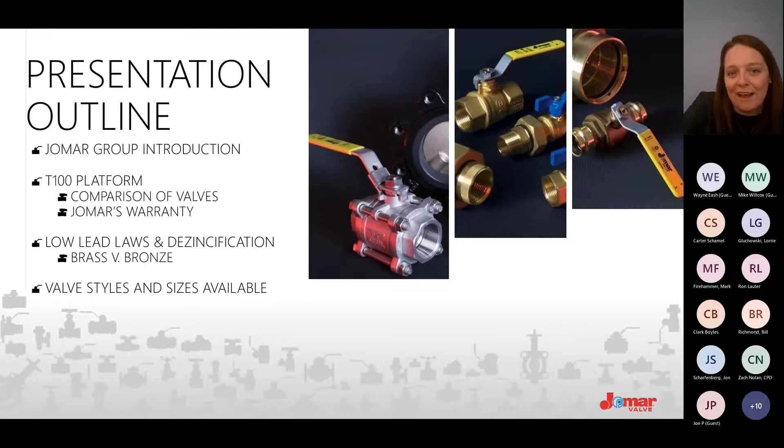We'll also talk about low lead and dezincification resistance, also known as corrosion resistance, and then we'll talk about our product offering. So again, please feel free to jump in at any time if you have any questions or want to know a little bit more about something.

So Jomar Group, we have been around since 1966. We were founded by a man named Joe Martin, hence how he created the term Jomar. We are based just outside of Detroit, Michigan, in a town called Warren, Michigan. The photo you see there, unfortunately, that is not Warren, Michigan. That is an aerial photo of our parent company, Pettinaroli. Our parent company is based about an hour outside of Milan, and it looks like that almost every single day of the year, with an absolutely gorgeous view of the lake.

That is where we manufacture. That is where we engineer, design, and test. That is where the bar stock comes in and the valves go out. It's really an amazing facility. So that is really where the majority of our product is manufactured, right there in Italy.

Now, one of the things that's really wonderful about Italy is that they meet the exception to the Buy American Act. So they still fall under the Buy American Act, even though the products are manufactured outside of the United States. We were able to meet that based off of our trade relationships. We'll talk about that a little further along, but typically the first question when people hear that we manufacture in Italy is, can that be installed on government projects? And it absolutely can.

So Pettinaroli has been around for over 83 years. It is in its third generation of a family business. How we really got our start with them is that they manufacture gas valves. So we are known as the flagship valve in gas. We manufacture what's called a lock-wing valve. Almost every single gas metering assembly that you see around the country has a lock-wing.

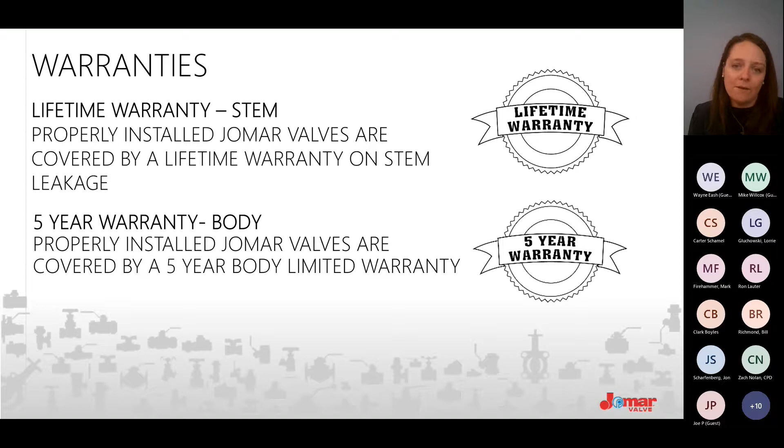So talking about being the best, you'll often see that Jomar ads say the best ball valve on the market. It's a pretty bold statement. So how do we make sure that we stand behind that, and it's not just a regular piece of sales fluff or a sales pitch?

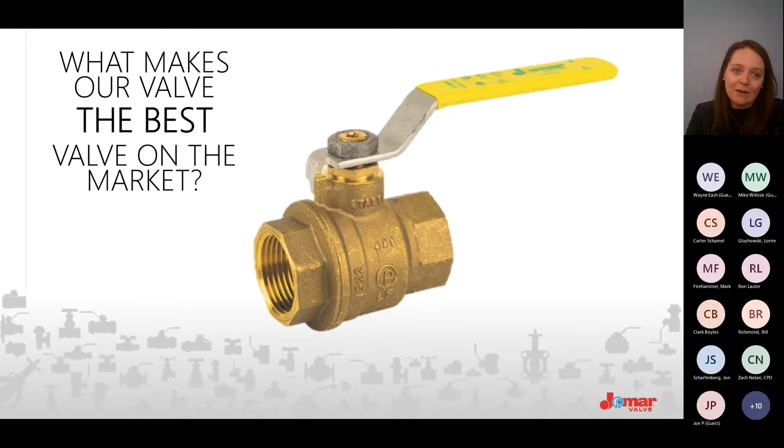So first, we start by talking about exactly what I said about manufacturing in Italy, is that we fall under the Buy American Act. So we definitely can be installed on government projects because of that trade relationship exception. So we're talking schools, military bases, any type of federal project we can be installed on, any type of state-funded project we can be installed on, even though our product is manufactured in Italy, because we do fall under the domestic approval for the Buy American Act.

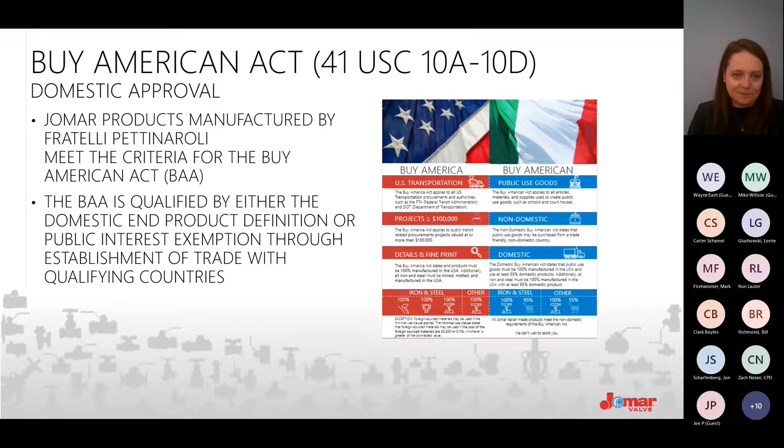We also have more certifications than any other valve on the market. So we have full NSF 61 certification for our plumbing products. So not only are all of our plumbing products lead-free, but they are also not leaching anything else into your water system. That's the biggest difference from NSF 372, that's your low lead standard. NSF 61 is not only your low lead, but we take it to the next step to make sure we're not leaching anything harmful into your water stream.

We have FM approval. We have over 7 UL listings for gas, so any of our valves can be installed on gas lines. When Joe Martin created the company, I know I mentioned that we really focus on innovation. One of the things that we wanted to do was to have one valve that could be installed on multiple applications, because in the late 60s, when Joe was starting Jomar, you had one ball valve for plumbing, one ball valve for hydronics, one ball valve for gas. You had 3 valves on one truck, and Joe thought, this is wild, let's just have one valve with multiple certifications. That is the standard in today's industry for all valve manufacturers, but Jomar was the first to do that and bring that into the marketplace.

We also have Delta C certification. I know many people ask, what is the Delta C certification? And that is for gas appliances for kitchens of 5 inches or smaller. It's a certification that we carry as well. So we really stand behind our gas applications.

Now, our T100 platform, as I mentioned in the beginning, is really the bread and butter of our ball valves in our company. So our T100, I'm going to go through it in detail.

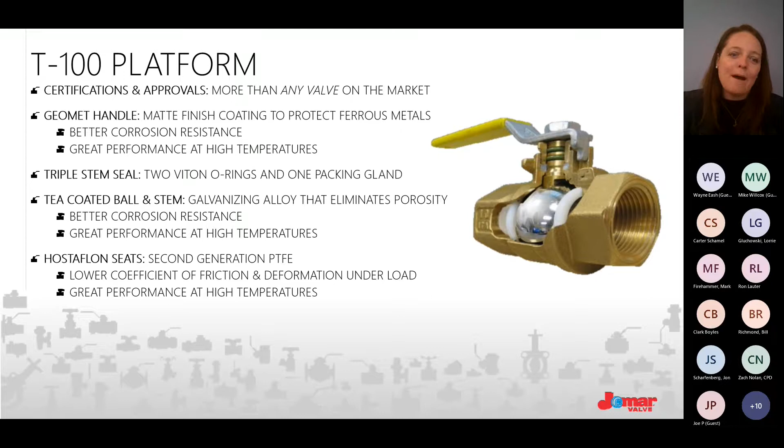Now, I know I mentioned earlier that Jomar runs ads saying that we're the best. So we just went through a few points that talk about being the best. But what I think is really the biggest thing for us to show that we truly are the best ball valve on the market is that we did a 3rd-party test with IAPMO. We wanted to know how would our valve perform under a 600 wetted PSI test? So it's an actuated test, turning ball valves on and off to see how many life cycles they would go through before a failure occurred.

So the test is in the bottom row of this slide. On this slide, you'll see we list all of our certifications for Jomar. We list our triple stem seal feature, how our ball has that TEA coating on it. We talk about our seats, how they have that second generation Teflon, and we compare it with our competitors. So our competitors are in rows 1 through 7. Now we don't list our competitor's name, but we list our competitor's series number. So the 70 series is now better known as the 77 series, the 585 series. I think everyone knows that series, but just showing you the difference between Jomar in regards of certifications, style of the valve, different components of the valve.

But the last one, the cycle test average, is really the most important. So Jomar's valve made it to over 12,000 life cycles before a failure occurred, with our next closest competitor falling just below 6,000. But the two biggest players in the industry were just over 1,000, and the other was just under 2,200. So from a life cycle standpoint, we outperform the competition 6-fold, 10-fold, 5-fold. Over and over again, we are outperforming the competition.

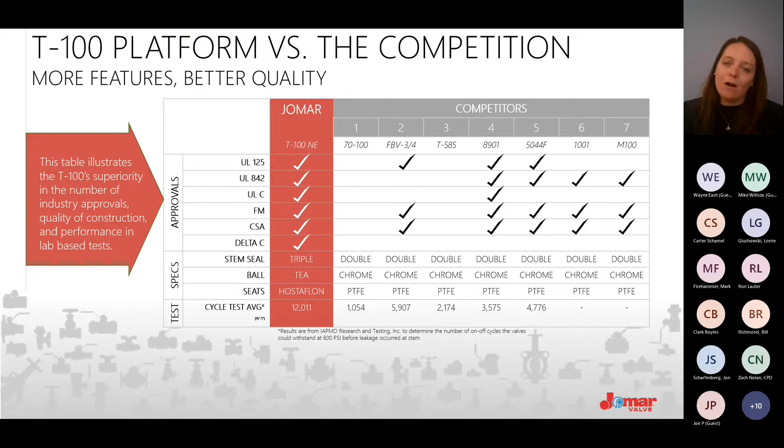Now, will you be opening and closing a ball valve 12,000 times? God, I hope not. I can't even imagine what application would require that. It would be some type of actuated application, probably an electric or a pneumatic application. But it's just nice to know that we had third-party testing from IAPMO stating this is how well our valve performs in the field. And that is why we say with full confidence that we are the best ball valve on the market.

So one of the things that we did was back in 2008 is when we started to manufacture our new low lead product. So in 2011, full federal acceptance was required to have a lead-free product. It went from being an 8% wetted lead content in the plumbing industry down to a 0.25% wetted lead content in the plumbing industry. It was a big upset because lead is really machinable. It gets along well with others, but it does not get along well with humans. When we consume it, it can be poisonous. So that is why all manufacturers had to remove lead from their alloy unless it is 0.25% or lower of the wetted lead content.

And this is all as a result of the Safe Drinking Water Act. So what we did is that we did things a little bit different. We basically had binary alloys, so we increased the elements of two of the components of our alloy and had a really great effect in the field.

So one of the things that's really wonderful about Jomar's product is that our valves do not require a special tinning flux to solder in the field. Other manufacturers do require that because they have a higher silicon presence, or the element of silicon is more of a presence in their alloys. They require a special tinning flux. Our valves will solder the exact same way in the field as they did before the low lead laws.

Any wholesalers, any contractors, any designers on the call today, we will happily send samples. We'll happily show how our valves solder. We are happy to provide samples to show that that special tinning flux is not required.

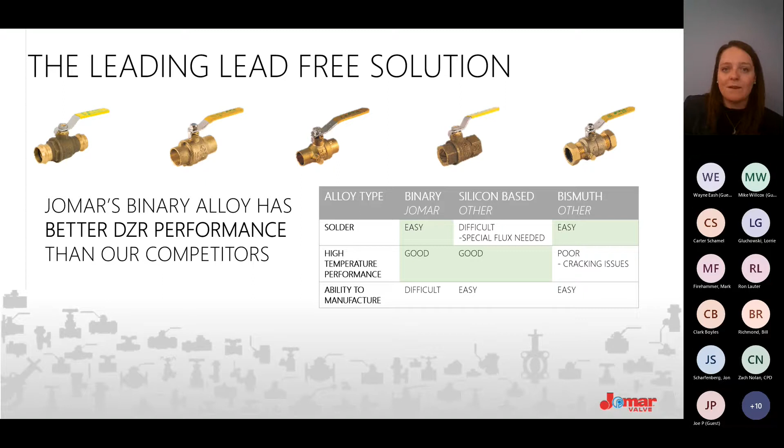What we did is that we increased our copper and we increased our zinc. And as a result, it was really difficult to machine. So we spent over $1 million in new machining. But our valves solder the exact same way as they did before the low lead laws, and they do not crack at higher temperatures. So although difficult for us to figure out, it has been really, really great for the end user because they solder the exact same way in the field as they did before.

Now, something that's different about Jomar is that we are a brass alloy. I know many people in the United States have both brass and bronze in their specifications, which is wonderful. And most valves that are installed on most commercial as well as residential jobs are brass valves, but some designers still do have a hard bronze specification. Our valves can go toe to toe, as I will show in the next few slides, with bronze valves, and that's because we do something different. We heat treat our product.

So we heat treat our product to over 1,000 degrees Fahrenheit, and that changes the molecular structure of our product. It goes back to material science. Brass is composed of two phases, both an alpha phase and a beta phase. Alpha is your dezincification resistant or corrosion resistant. Beta is susceptible. So when we heat treat it, we turn it into a 99.5% alpha phase, basically making our product entirely corrosion resistant, entirely dezincification resistant, and allowing it to perform the exact same way as bronze materials in the field.

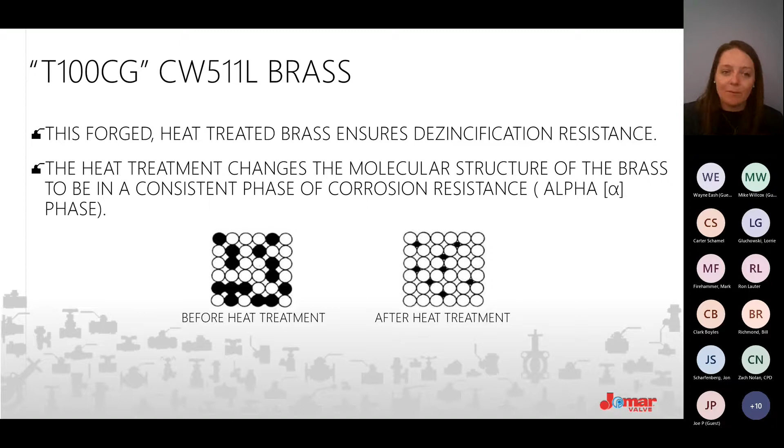An analogy that some of my coworkers like to use, and I use as well, is that when you think about our product, it's almost like baking brownies. You can have all of your brownie batter mixed before you place it in the oven. That is not brownies quite yet. You have to bake them and then pull them out of the oven, allow them to cool down, and that's exactly how we feel about our product. Our valves are not fully corrosion resistant until we bake them as well and take them up to over 1,000 degrees Fahrenheit.

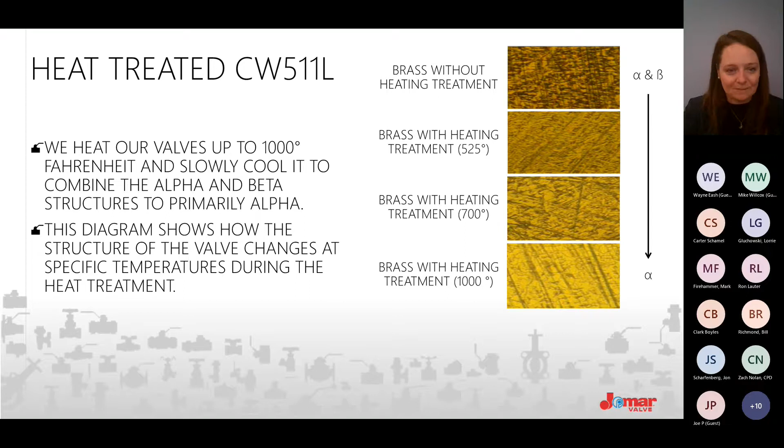Jomar was the only brass valve manufacturer to perform the exact same way of having 0 depths of dezincification or corrosion on their alloy as a result of running the ISO 6509 standard. So our products truly do perform and outperform the competition when it comes to corrosion resistance. We often hear designers say they're apprehensive to install brass because of their zinc composition. That is not something to worry about with our product because of that heat treatment process.

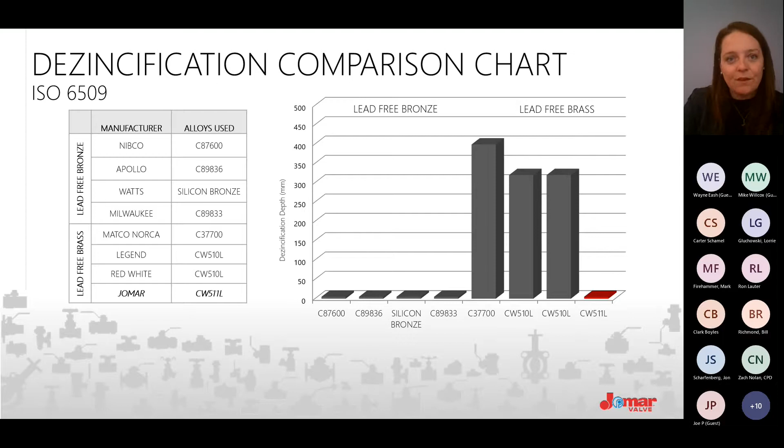So when it comes to our valves, another thing we usually get is: you have the best performance in the field, you have the most certifications, you offer a lifetime warranty of leakage through the stem. From a pricing standpoint, how much more does your product cost? Now, I'm very much aware that today's presentation is recorded, so I will not give out any concrete numbers, but we typically come in less than the other players in the market, which is one of the things that's really nice. For the domestic players, we usually come in just slightly under them, and with the other large brass players in the industry, we come in toe-to-toe with them.

So with our products, not only do you have great performance, but you also have that lifetime warranty of leakage through the stem. Also, we have often seen a trend in some wholesalers bringing in our lead-free product to sell for both their lead-free as well as mechanical lines, because that way they can just have one valve in-house. So that's something we've also seen.

Now, with our flagship valve, our T100, we have threaded, sweat as well as press end connections. And our press end connection does have a leak path design. So you can do that low pressure leak path testing on our product to make sure that the valve is pressed correctly. All of our valves are full port. We do not have reduced port valves. We will always have that full flow. We will not have that reduction or increase in pressure, I should say. We do have stainless steel trim available. We do have CAD files available, Revit files available.

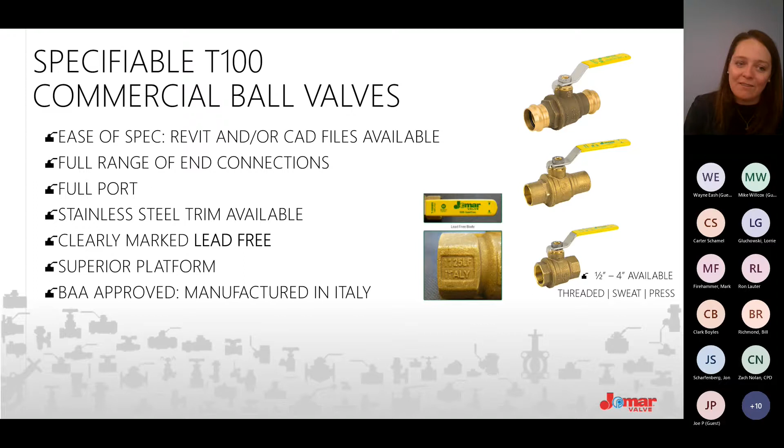All of our lead-free product is marked lead-free on both the handle as well as the valve body. You will see there's 4 numbers forged on the body of our valve as well. In the image that's zoomed in, it's the week and year of manufacture. So year first, week second. So every single one of our products is fully traceable. We fully stand behind our product. We want to make sure that every single person is comfortable specifying, comfortable installing, comfortable purchasing, and we are really, really proud of the products that we manufacture. 1/2 inch through 4 inch available for lead-free. We'll talk about more valve sizes once we start talking about other valve styles and sizes available.

I've been talking a lot, so I'm going to take a quick sip of water, if that's okay with everyone, for one quick minute.

And now we're going to start talking about our other commercial product offering. So we do have a full commercial catalog available on our website. We still do have print catalogs available as well. But for our lead-free offerings, we really like to highlight our ball valves. We are well known in the PEX industry for PEX connections as well. We do OEM product for Uponor, we OEM product for Grundfos. We have a lot of big OEM partners. So we definitely are really compatible with our PEX connections as well.

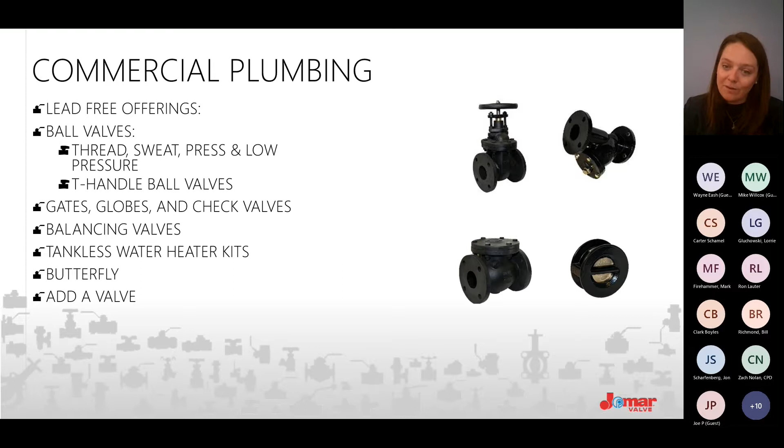We offer gates, globes, and check valves, balancing valves, tankless water heater kits, butterfly valves. And then I'll talk about two products at the end of today's presentation that are exclusive to Jomar. One is our filter ball and the other is our add a valve. So for our gates, globes, and checks, all of our gate valves, globe valves, and check valves are available in at least 1/2 inch through 2 inch in our lead-free product offering. For our hydronic side, they get up into larger sizes. So we have 4 through 12, all the way up for all styles of the valves.

Now, one of the things we've seen really increase lately is cast iron valves that have been installed on designs. We've also seen an increase in spring-loaded check valves. I think a lot of designers are specifying that because their operation is silent. We do have traditional swing checks as well. So we do have gates, globes, and checks.

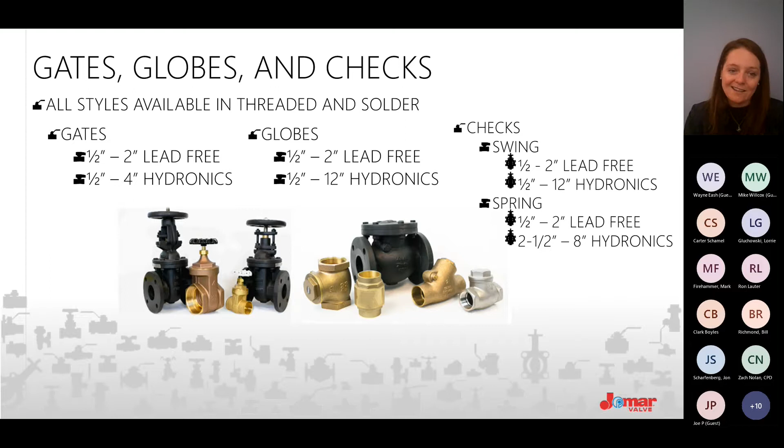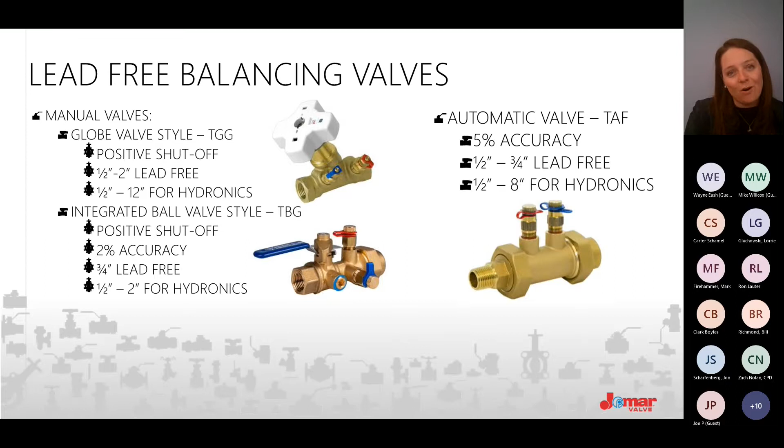We will be debuting a new balancing valve this year as well. So keep your eye out if you're attending AHR or ASHRAE or following that, we'll be having a new lead-free balancing valve coming out in 2022, which we are really excited for.

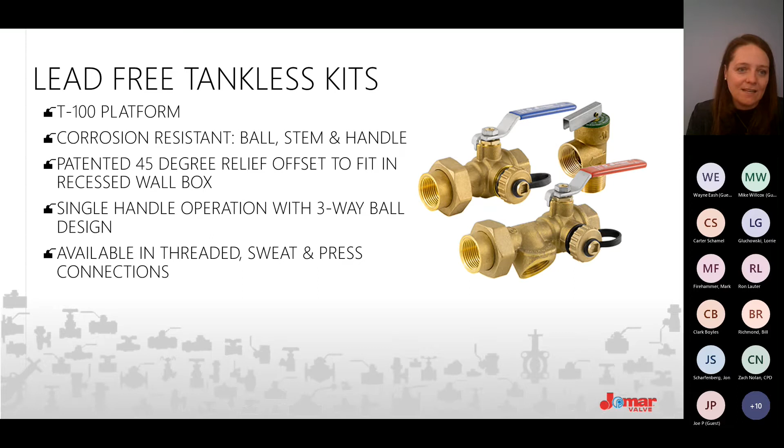Really well known. Some tankless water heaters do come with the tankless kit already installed. Not all manufacturers do. I know that Navien, which is a line that I know PM has had, does not come with the tankless kits. It's a really great partnership with that, selling our tankless kits with their tankless water heaters.

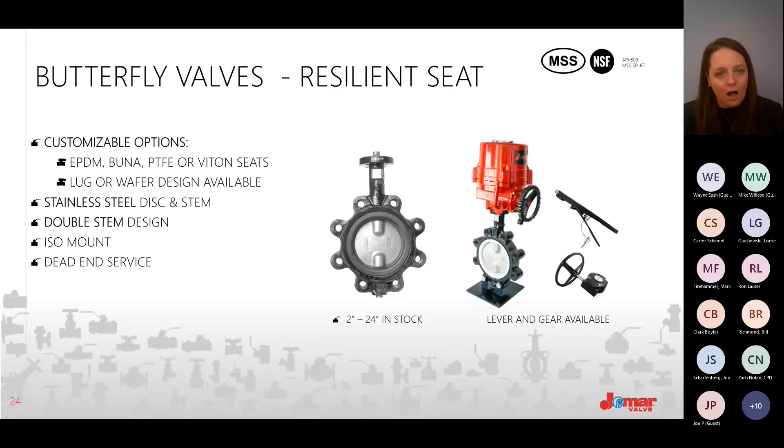We have both lug and wafer styles, EPDM, BUNA-N, PTFE, or Viton seats. We do have full NSF 61 rating on those products as well. And we do have standard ISO 5211 mounting on all of our butterfly valves. Why that's really important is for actuation. As I mentioned in the beginning of today's presentation, we do have a full actuation house under our roof in Michigan at Jomar, so we can actuate all of our product. All of our butterfly valves actuate very, very easily, which is wonderful.

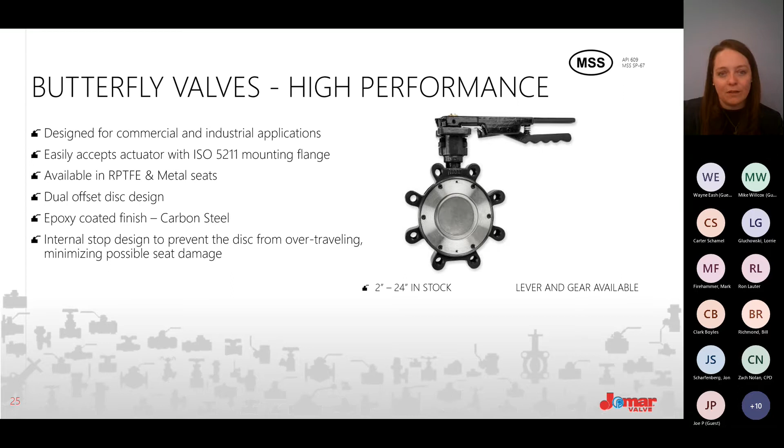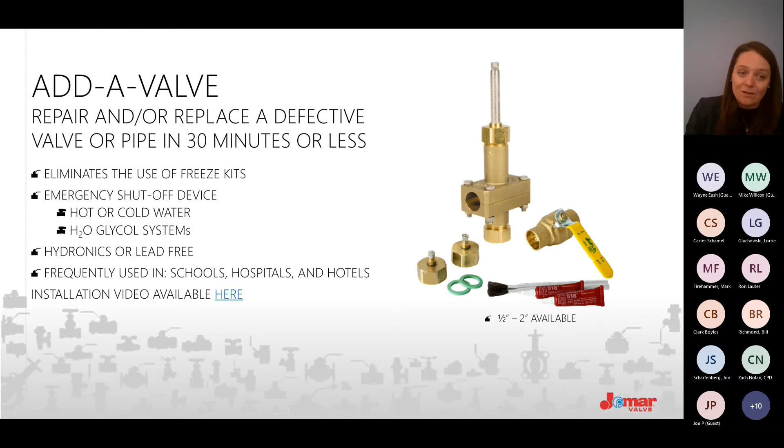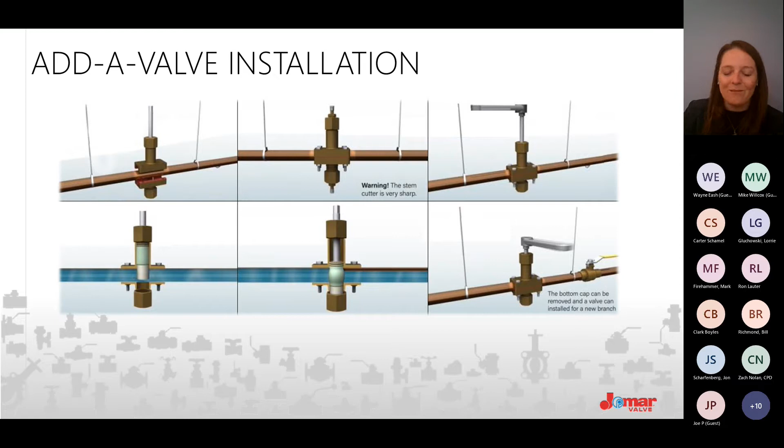We do ship out in the kit all of the pieces that are right here on this slide. So you do have your replacement ball valve. You do have all of the bits that are available for when you have to drill. You have to basically drill through your pipe. But the nice thing is that you don't use the drill. You just use a standard wrench to create that stop in the line. Now, it does become a permanent fixture on the line. So one of the things that we often have is that we'll have a water cooler run off of the line in the future, because that does remain there. AddaValves are what we're well known for as a unique product to Jomar. And then we are also known for our Filterball. This product, unfortunately, is only available in mechanical applications right now, or hydronics applications.

We will be bringing it in lead-free, I'm hoping in early 2022. But this is a combination of a ball valve and a strainer in one. So what's really great about this is that it cuts down on leak points, cuts down on material costs, cuts down on labor, cuts down on space, because so often with strainers, they're installed in not the easiest places to access, and the access panels, as we all know, are never as big as they should be. It always seems like access panels are too small. So this is a really great product.

You have your strainer within the ball valve, and the nice thing about that is that the actual strainer size is larger than what the strainer is in a standard Y strainer, so it will catch more particulate. We do offer it in 1/2 inch through 2 inch, differing screen sizes. So we have 20 mesh through 100 mesh and 20 degree increments, which is really, really great.

We have had great success with this, especially in our coil kit packaging of our products. People love this for their HVAC lines because it's really nice to have everything, as I mentioned earlier, cuts down on space, cuts down on material, cuts down on cost, cuts down on leak points. So really, really a unique valve to us that people really like in the field because of how simple and sleek it is to run.

Now, when you have to clean out your filter, you simply take off the cap of the valve with a standard wrench, flush it out with water. If there is a particulate stuck still in the strainer, you can take out the strainer with needle nose pliers. You just go in, remove the C-clip, and flush the valve from there. But really, really a cool product that we are really excited to bring in lead-free as well.

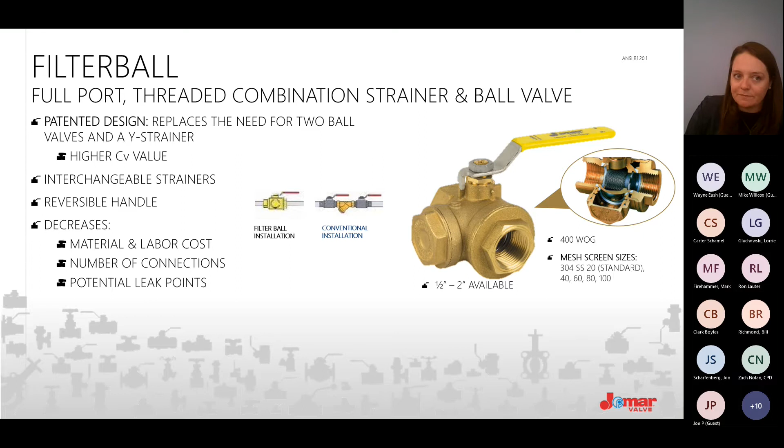One of the things that we also offer is medical gas valves. Something that we do is that we individually clean, individually bag, and individually box all of our medical gas valves. All medical gas valves are supposed to be individually cleaned and individually bagged. That does not always happen in the industry, so we really make sure to adhere to all individually cleaning, individually bagging, individually boxing. We want to make sure that everyone is receiving the best product, fully oxygen clean when it arrives to your job site.

I should have mentioned this earlier, but 100% of our product is tested before it ships, including our medical gas valves: blowout proof stem, 3-piece 4-bolt design, latch locking handles, so it falls in full code compliance, and it does have K copper tube extensions that are silver brazed. So 1/2 inch through 2 inch available for our medical gas. Single or double purge ports are available. We often see either no purge port with what people are ordering or double. We rarely see a single, but we do offer that in case that is something that you are looking for on a specific job.

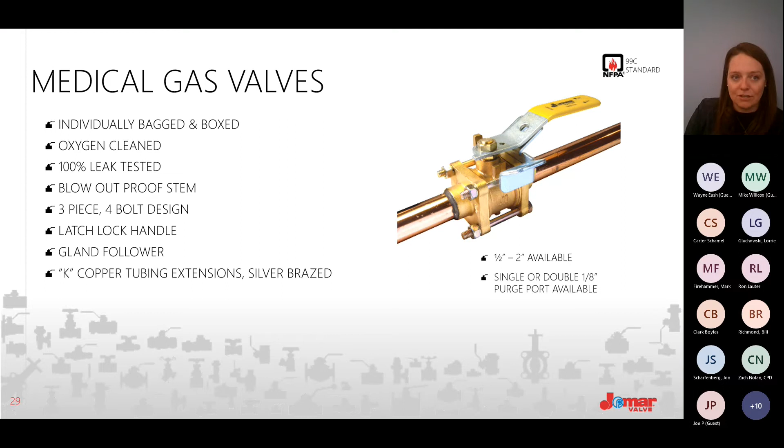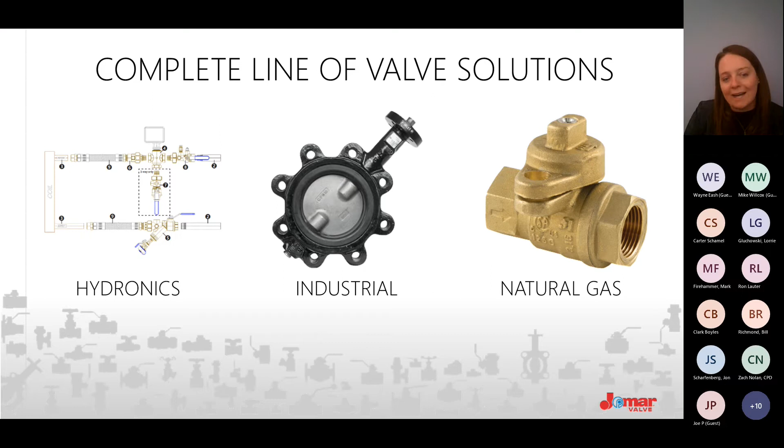Now, we are a full valve house. We do have a hydronics line, industrial and actuation line, then a natural gas line as well. Something I realized too, I forgot to mention about our butterfly valves, is that all of our butterfly valves ship individually bagged and individually bubble wrapped. So that way, when they ship, they will not be damaged in shipment, but also they won't have debris or buildup occur when they're laying on a job site. Not that this happens, but if a valve was left out during a storm, sometimes construction sites get muddy. We don't want that happening or debris getting on our product. So we do individually bag as well as individually bubble wrap. It's again another area that we were listening to what people were asking for in the field.

So Jomar Hydronics is paired with our sister company, HCI, Hydronic Components Incorporated. Just like every other aspect of Jomar, we have a fully dedicated engineering and product team that handle the process start to finish. We will fully size your job for you, fully bag your job for you, and fully tag your job for you. So when it goes on your construction site, all of the zones are clearly labeled. So both manual and automatic balancing valves for this style of balancing. We also do have pressure independent control valves as well. I know PICVs are really increasing in popularity. And we do have complete 2-way and 3-way coil kit packages. Again, fully Italian made, Buy American Act approved.

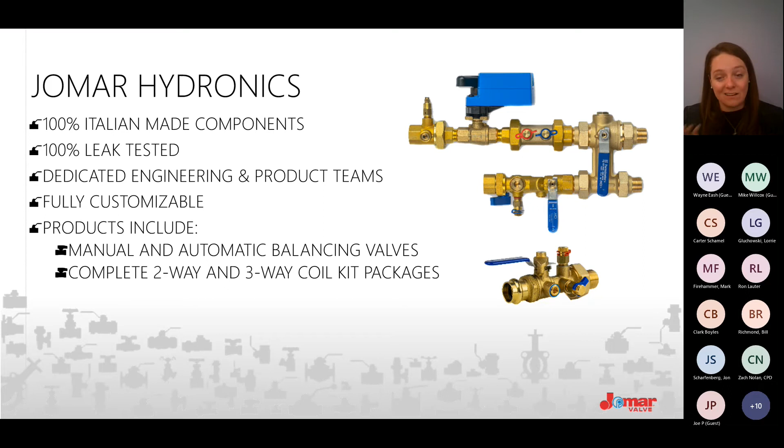All of the individual kits are put together right in Michigan. Industrial and actuation, dedicated product manager, as well as full team for actuating our product. All packages are assembled and tested before shipping from our team in Michigan. So another thing that's really great is all of that occurs right in our backyard. Both a full range of pneumatic and electrically actuated packages and accessories.

We do have an ASPE accredited actuation presentation. So if any of you are looking to learn more about actuation, Tiffany or myself can happily set that up with your team. It's about an hour-long in-depth presentation about how actuation operates. It seems to be an area where when it comes across on projects, people will kind of get nervous, not really sure how to answer questions, not really sure how to apply.

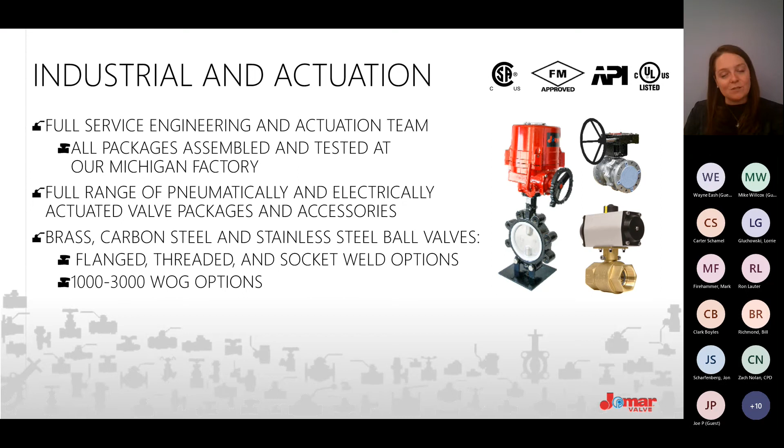It's something that we have full confidence in. We have a full product team, we have full training on it. So we're truly happy to answer any questions. We can do brass, carbon steel, stainless steel ball valves, butterfly valves, flanged and threaded end, socket weld options, as well as for those higher pressure applications, we do have 1,000 to 3,000 WOG options as well.

And the last part of today's presentation is that we'll talk a little bit about our natural gas products. I know in the beginning I mentioned that we're really well known for our Lockwing valve. So that is that valve that's in the center focus of the slide. We are also the #1 choice for the natural gas community. Our tailpiece gas valves are really, really well known. You'll often see them on pretty much every petroleum truck that you see, and it's because of that triple stem seal. So we do offer both a 2-piece tailpiece design as well as single.

I think it's a teardrop design is what it's called. So we do have differing handle styles. We have differing certifications, numerous certifications, differing end connections. We really are the #1 choice in gas because of our rigorous testing, because of how long our life cycles are, as well as that lifetime warranty of leakage through the stem. So as I mentioned earlier, we are known for our Lockwing valve. We also have our bypass valves for easy meter maintenance or change outs available as well.